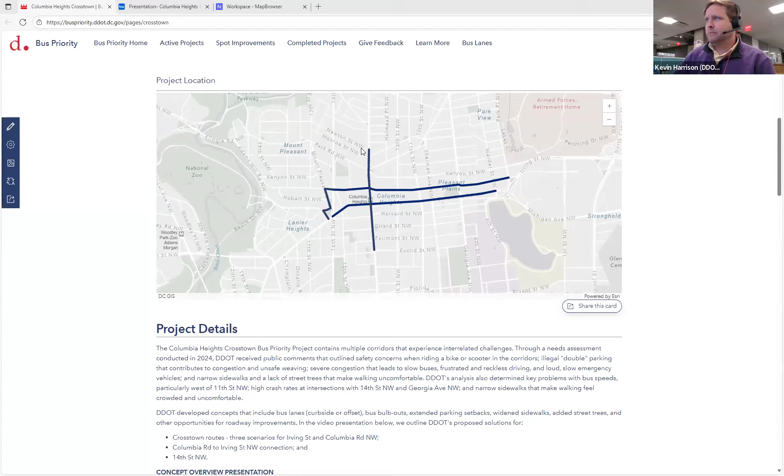It starts with an overview, then a map of the project limits, the areas where we're working, which are Irving Street and Columbia Road, primarily between Mount Pleasant Street and Park Place and Warder Street respectively, and then 14th Street through Columbia Heights. There's a YouTube video of the full version of this presentation you can watch anytime, about 30 minutes long.

Then there's this concept map, which gives a schematic view of the different concepts we're looking at, so read the disclaimer. And there's an interactive map where you can see the existing conditions, jump between the different scenarios, get a general sense of how they come together differently, pan around, and see notes drawing your attention to different aspects of the design.

We'll get more into it, but there are three scenarios for the crosstown routes, Irving and Columbia. Then there's the proposal for changes to the connection the bus makes between Columbia Road and Irving Street via Mount Pleasant Street, and some proposed changes to 14th Street, with call-outs directing your attention to what those differences are.

So that's a really helpful tool. An important thing is you can also post comments right in here. If there's a specific thing you want to call out, you can click on the map and insert your comment. I'm not going to post one now.

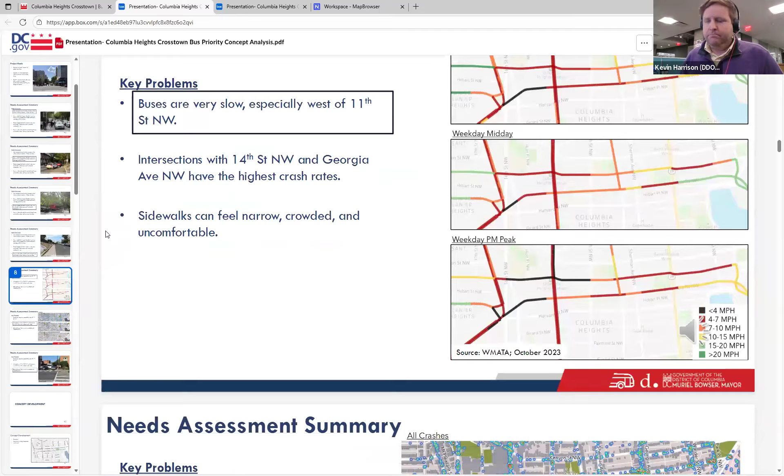The three key goals for this project are to improve the speed for buses. Right now they're extremely slow. You can see in this map on the right that where it's black, buses average under 4 miles per hour, and where it's red, it's in that 4 to 7 miles per hour range. So through almost all of the corridor, during at least some times of day, buses are very slow.

These crosstown corridors cross two streets that are on our high injury network, 14th Street and Georgia Avenue, and those two are also two of the highest crash locations on those streets. On an annual basis, there's about three times as many crashes as the other intersections. So as we work on this project, we'll be looking for opportunities to improve safety.

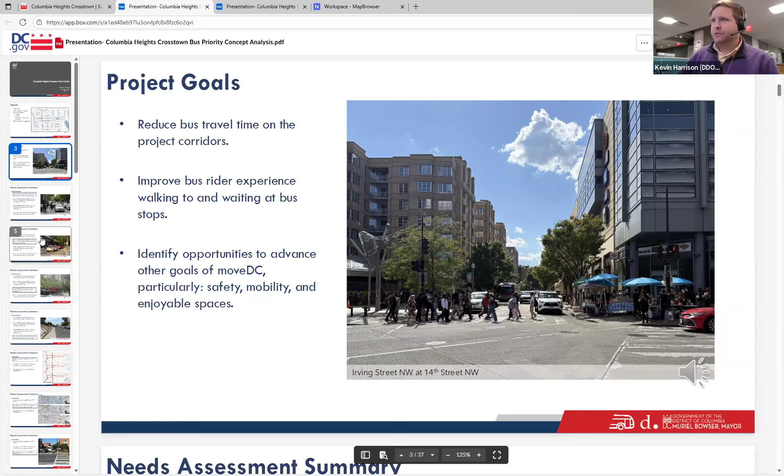To that end, the project goal is to reduce bus travel time, improve bus rider experience—obviously in terms of that travel time, but also importantly the experience walking to the bus stops and waiting at the bus stop—and identify other opportunities to advance the goals of moveDC, our long-range transportation plan, in particular safety, mobility, and enjoyable spaces.

To achieve those goals, I'm only going to give a brief overview right now, but we're proposing three different scenarios. One is curbside bus lanes, shown on the left, pretty much throughout the entire corridor—we refer to that as scenario one, using this section through all of Irving and Columbia in the project area.

Number two is what we refer to as offset bus lanes, where there's parking between the bus lane and the curb, and then the left lane would be a travel lane.

The third scenario is a combination of curbside bus lanes and what we refer to as the traffic calming section. So scenario three has two different sections, 1 and 3, shown here—to the west of 11th Street would be the curbside bus lanes, same as scenario one.

But to the east of 11th Street, would be parking on both sides of the street. Generally speaking, scenario two with the offset bus lanes is the best for public transit because it provides benefit to bus riders all day, every day, 24 hours a day, 7 days a week.

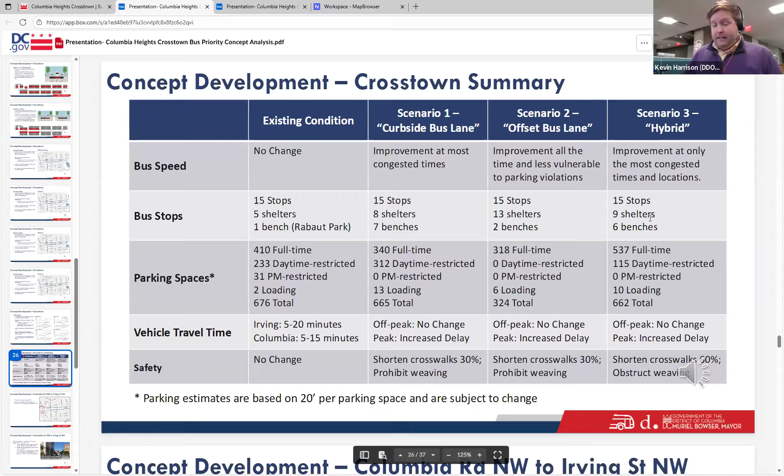But it would be focused on the times of day when congestion is the worst. Scenario three only provides benefit to buses at the times of day when buses are the slowest and in the locations where buses are the slowest. So it provides the least benefit, but there's some other advantages to it.

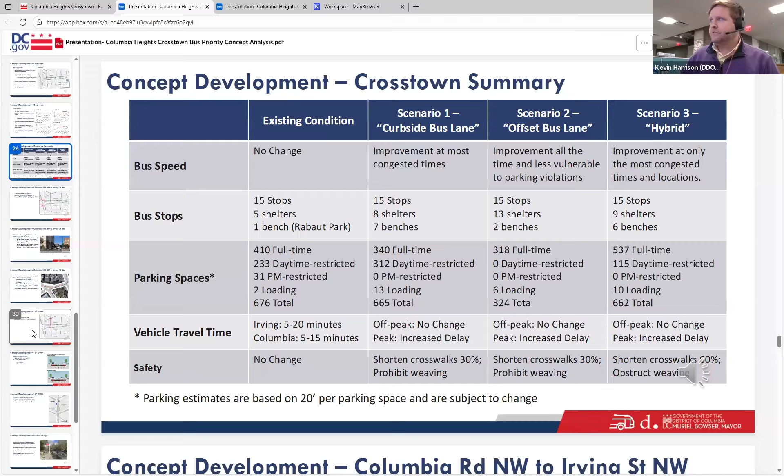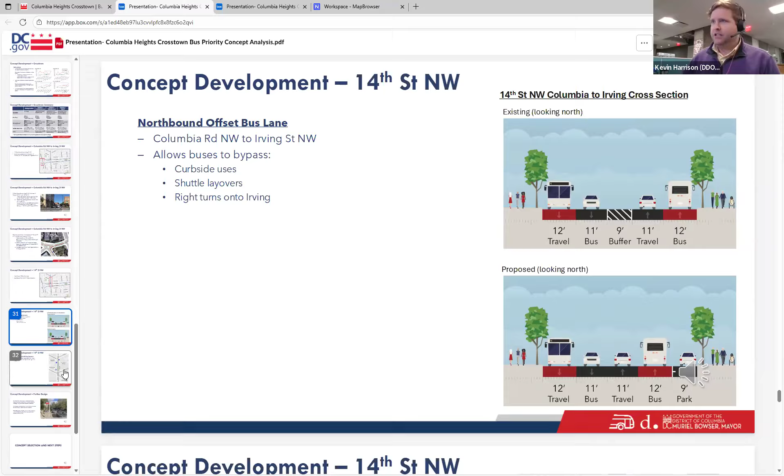I'll just touch briefly on the changes proposed for 14th Street. One would just be moving the bus lane from the curbside to that offset position, so that there would be a parking lane between the sidewalk and the bus lane for one block between Columbia and Irving in the northbound direction. That would allow space for overflow with the shuttles to Washington Hospital Center and other short-term curbside uses.

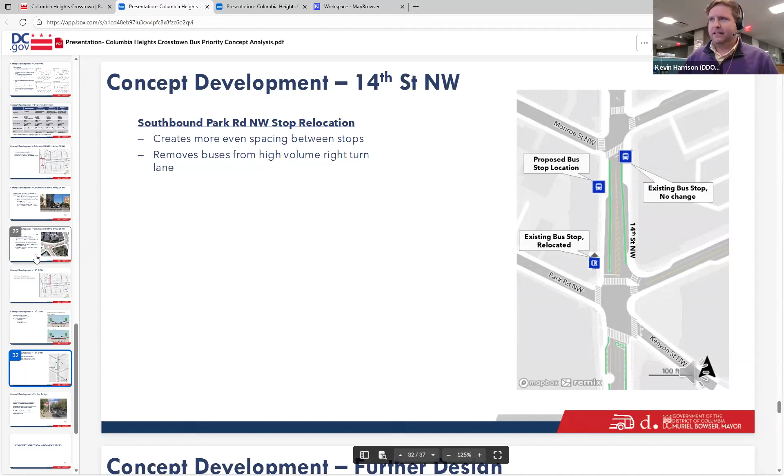We would also move the bus stop at Park on 14th Street southbound from Park Road to Monroe Street. I know you guys are in the more eastern side of the project area, but just for awareness about what's proposed on 14th Street, and happy to answer any questions about the roundabout we're proposing at Argonne and Harvard and the sidewalk widening on Irving Street, if you're already familiar. But I'm guessing you'll be interested in focusing more on the east side, so won't get into too much detail there. That's a quick overview.

I'm happy to answer any questions or go into more detail on any of this. But yeah, defer to you all.

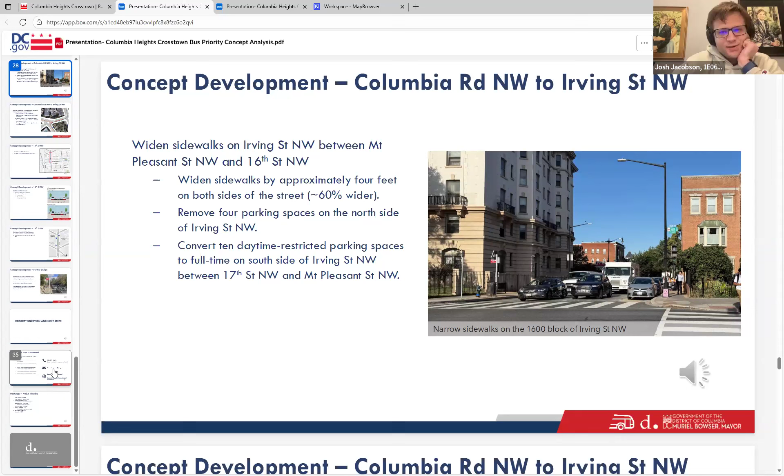Thank you, Kevin. Perfect timing. I think that was 9 minutes.

Oh, and last thing I'll note is that we are currently in a public comment period, ends December 5th. There's a survey that you can fill out at the bottom of the website to give feedback. This is the best way to do that.

But sorry, that's really it. Happy to answer any questions.

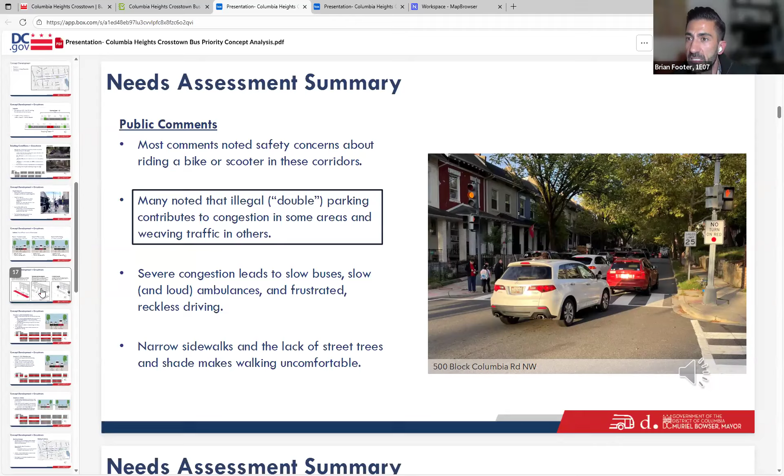Okay, and a lot of the behavior you're talking about — for example, in the image here is a commercial vehicle who's probably dropping something off, or maybe somebody's moving. How would you mitigate that kind of behavior? You're setting that as one of the causes of crashes. If there's only one lane, where do they go? If there's a bus lane and one travel lane, are they going to block buses, and is it just creating chaos? How do we mitigate other behaviors already happening in the current state?

One of the things we're proposing as part of this project is what we're referring to as extended parking setbacks. In the district, you're not allowed to park within 25 feet of a crosswalk. What we're proposing is at many intersections, increase that setback by about 25 feet, so throughout the corridor there will be a space — depending on which side of the street has the full-time parking — set back about 25 feet for short-term access. It's not a guarantee that whenever anybody needs to make a delivery to one of the houses on these blocks that it'll be available, but it'll increase the probability.

Depending on the scenario, people who commit violations will be either in the bus lane or the left travel lane, and there is automated enforcement for that. So the hope is that people use an alley or side street for loading instead of the street.

The extended parking setback is fantastic. One of the things I've been hearing from a lot of people is that there's been a lot of disruption, particularly in commercial corridors, where food deliveries and things like that have no space to stop, so they end up going into bike lanes or double parking, and it's very disruptive. So that seems like a really good way to mitigate some of that.

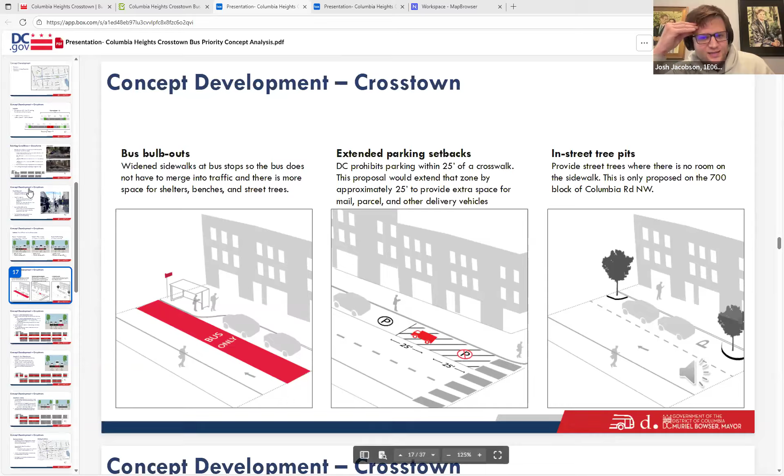Thanks, that's helpful. Another thing I've been trying to puzzle through is another data point I'm not sure if you have — I remember for the Georgia Avenue bus lane project, DDOT had data on the percentage of people moving through the corridor in private vehicles versus the bus, and I think the bus was roughly 51%. Does DDOT have any data on the modes of transit going along Irving and Columbia today?

I think there's over 6,000 people a day that ride the C61, which is the main route that goes through this area, but there's also the C74. And then each street, I believe it's in the 4 to 7,000 a day range. Columbia Road has higher volume than Irving, but they're comparable. I don't know what the exact percentages are.

Oh, those numbers match up with what I've seen for the buses. I guess I'm curious more along the percentages — what sense do we have of the percent of people going through the corridor that are on the bus versus in a private vehicle? Some of that can be easier to sell to the public if they hear, oh, like 50% of the people on the road are actually in the bus.

No, we don't have it. I don't think it's as high as it is for Georgia. But yeah, it's about 6,000 average daily riders on the C61, and then the average daily traffic on Irving and Columbia is in the 4 to 7,000 a day range.

Sorry, when you say average traffic, do you mean 4 to 7,000 vehicles? Yeah, 4 to 7,000 vehicles. Okay, so it's still probably close to the 40 to 50% range, I guess, but it depends on the number of people in the vehicle.

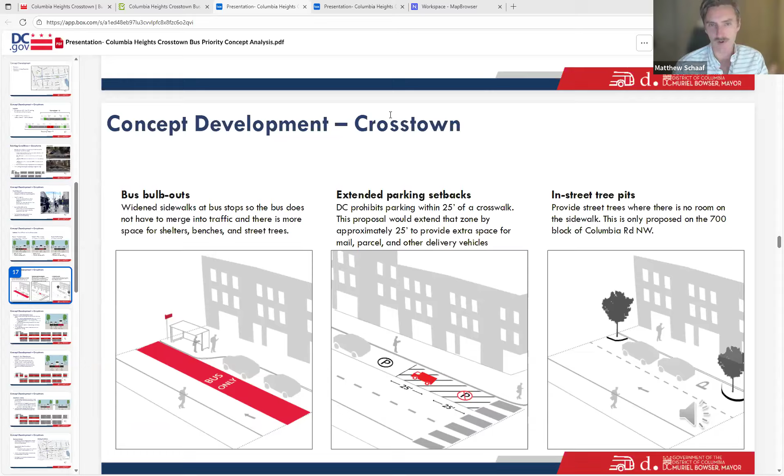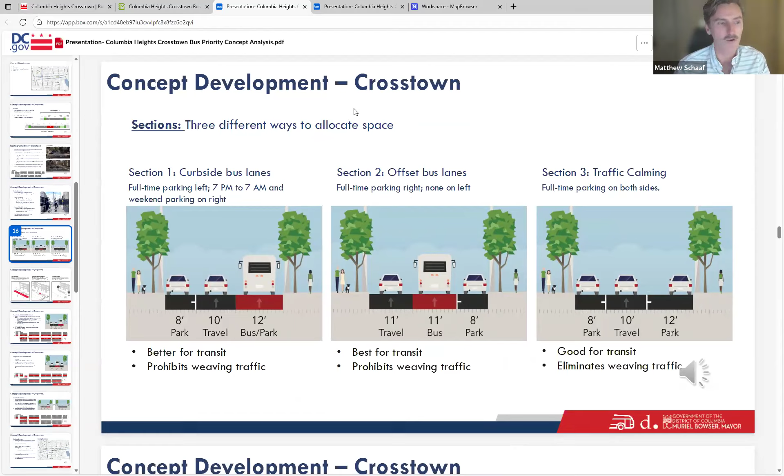Given that improving the bus experience and the timing and speed of buses is the priority, I wanted to ask about the proposal to have a bus lane that is 24 hours in some locations and a limited time period in other locations. Mostly I want to understand how does that transition work — do drivers actually follow that? As a car owner, I might not notice if there's a small number change on a sign for a couple of blocks stretch of the road, so I want to understand the logic behind that.

Yeah, so for this scenario one, it would be 7 a.m. to 7 p.m. for the whole corridor, 5 days a week. That's a slight change from the current curbside regulation, where on Columbia Road it's daytime restricted for the most part, 7 a.m. to 6:30 p.m. We'd actually be changing it to 7 a.m. to 7 p.m. just to make it more legible and easy to understand for people.

The one exception, kind of to your question, is on Irving Street from Mount Pleasant to 14th Street — it would be a 24-hour bus lane under all of these different scenarios. This is an area where parking is not currently allowed anyway, so it's not really any change in the parking regulation. These are the blocks where there's Lou's Sports Bar, and that stretch by what used to be the Wawa and the Five Guys. So that would be a full-time bus lane through there, and then it would switch to almost the same as the current parking regulation beyond that.

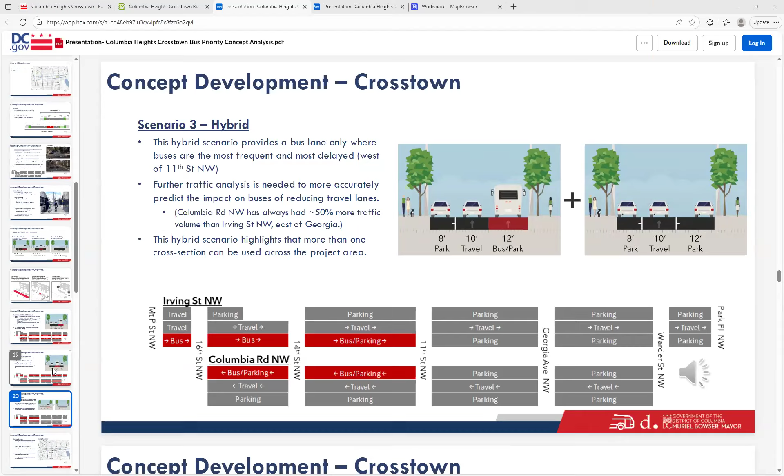I think it's interesting that we're highlighting the demand for parking on Irving specifically, because there's a parking garage right there. I understand this is a lot of retail parking and people want to run in and out, but we live in a society and people do need to park where there is parking. I think we should work on highlighting the fact that there is in fact a parking garage that people can utilize, which is a rare thing, especially in a super dense, transit-oriented area like the 14th Street Columbia Heights intersection.

More of a general question about the different proposals: 14th Street got a road diet, or bus lane, not too long ago, the one that runs from Fairmont up into Park. I would not call that project particularly successful. I'm a person who takes the bus on 14th and the bike lanes very, very frequently, and it's really frustrating to see cars parked there, the bus still moving slowly, being blocked. I'm a little frustrated to see more half measures being proposed to fix this, as opposed to doing what's going to be best for what DDOT is showing to be 51% of the users on the road, which would maybe be center running bus lanes.

To end this rant, my question would be: what is DDOT doing to make sure this isn't just another half measure, and that it will actually solve the issues for people in the neighborhood who rely on transportation, not car ownership, to get to work, the hospital, since that's been brought up a lot. What is the promise that DDOT is making to the people of the neighborhood to ensure this will actually improve our neighborhood, and not just make the traffic patterns worse and more confusing again?

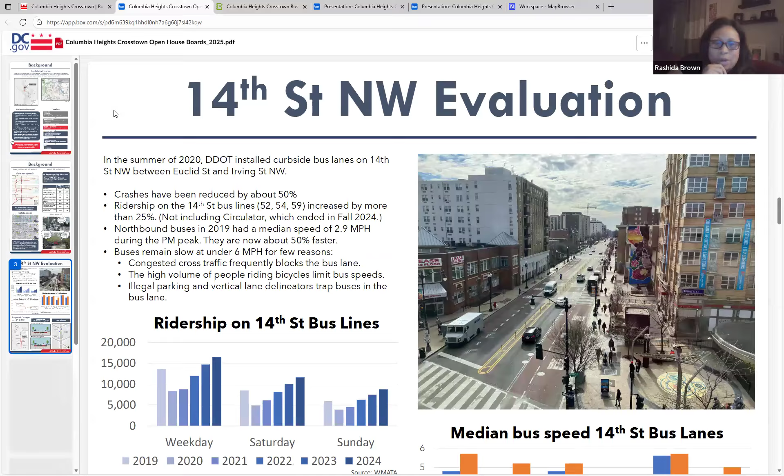Thank you, Kevin, so much for your presentation today and for all of your hard work on the crosstown transportation plan. I've been supporting the plan since 2014 when it was released and unveiled to the community, both in wards 1 and 5. This ANC, particularly when we were ANC 1A, has repeatedly supported this plan, both an overall concept of a priority bus lane and other traffic calming measures that come with this particular plan. Speaking as someone who has been part of this work from the beginning up until this point, it's been a real pleasure to be a part of.

I have just one comment, because a lot of this crosstown plan has been informed by prior studies, and there was one in particular done on Irving Street. The Priority Bus Lane project seemed two-pronged to me: one was to improve ridership and customer experience, but two, also to reduce speed down Irving Street beyond Sherman Avenue, because that's when the residential lanes start, as you move from 14th Street through Georgia Avenue and East. I'll just focus on East in our SMD now that we're ANC 1E. Speed has been a huge issue for us, as well as crashes that lead to injuries and deaths.

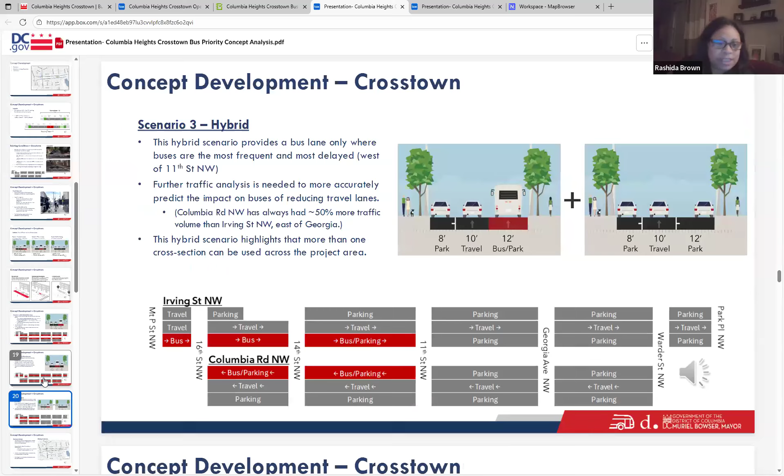I'm wondering if you can integrate that assessment data, the traffic and crash data, onto the assessment slide, just to demonstrate where we've been and where we are now. My community members in my single member district have been expressing support for the hybrid model, and that would be scenario one for us, recognizing that scenario two would be Mount Pleasant, 16th Street, 14th Street, and on until you hit our ANC. So, a question and a comment.

I appreciate that. And I didn't mention the crosstown study, which is a big part of what we're building on, which was completed—published in 2016, but the work had gone on for a couple of years, so there was quite a lot of public engagement. It was finished up right before I joined DDOT, but we certainly are building on that.

To your point about Irving and Park Place, you do see this large volume of crashes at that intersection. It caught my attention when I was looking through the crash reports, and DDOT did do a project, I believe in 2023, converting that right lane from daytime restricted parking to 2 lanes on the approach down to 1 lane with full-time parking on the right. They also replaced the traffic signals—there were two signal heads, one that stuck out 6 feet into the road, dramatically improving the visibility of the traffic signals, and added retro-reflective backplates to make them more visible. Having informally looked at the crash data, it was very effective.

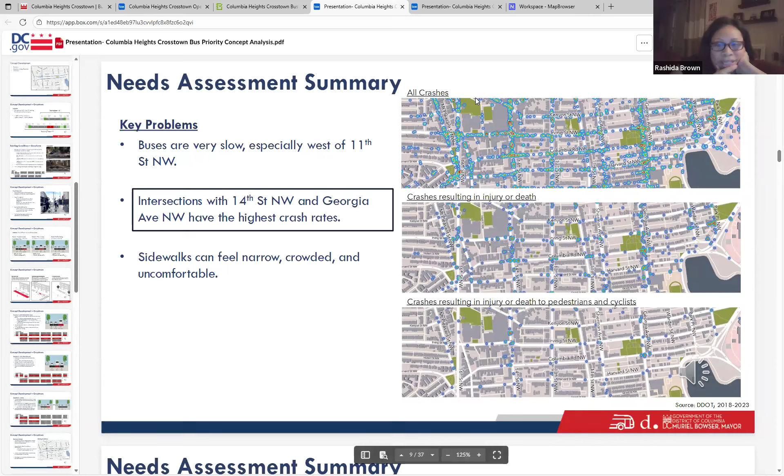I just wanted to say for the record, for my SMD community members, that the lane of parking, while it's enjoyable to have, is less about convenience and more about the fact that we've reduced crashes significantly. Lifting that up during non-peak hours is just a concern for me. But we're all full proponents of the priority bus lane.

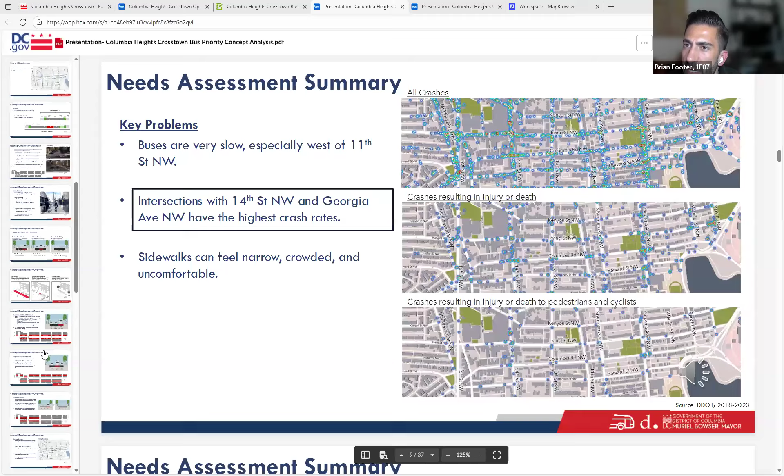In trying to determine where the bus lane would be—either furthest away from parking or right along parking—is there any pro or con? What ends up happening? Is it better to have it next to parking because there's less vehicular traffic and pedestrians getting to cars are less likely to be affected, or what's the science there?

The general concept with the offset bus lane is that when cars stop to do quick pickups and drop-offs, it's not happening in the bus lane. It's been effective in other areas—there are examples on H Street Northwest and I Street Northwest downtown where the parking is between the bus lane and the sidewalk, as opposed to having the bus lane adjacent to the sidewalk. I'm not sure if this answers your question exactly, but that's the idea—to reduce violations so the bus lane stays more open. Awesome, that answers it perfectly. Thank you.

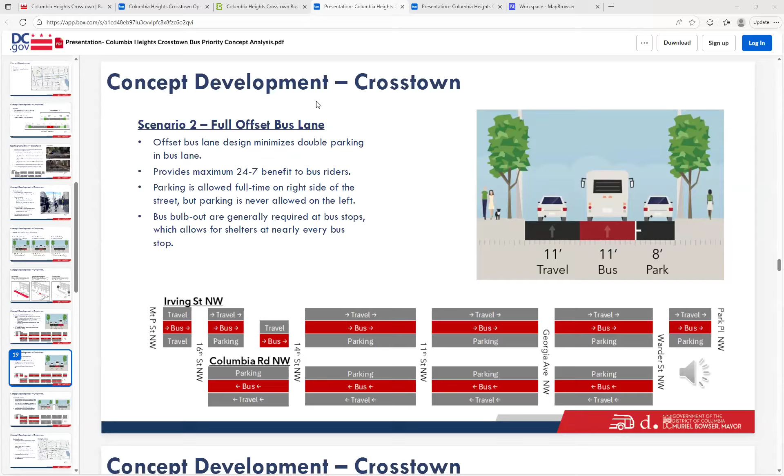Following from some of the conversation, Kevin—curious, given Commissioner Brown's concerns, are there other ways DDOT could address some of those reckless driving concerns with scenario one east of Georgia, or do you think those are probably going to happen no matter what?

It's a good question. I'd want to take that back to our engineering team and some of the other planners and see what they think. Some of our bus lanes have been in long enough now that we might be able to read a little more detail from the crash reports and see how frequent that type of behavior is, at least in terms of resulting in crashes. Also, some locations have traffic counters that tell us speeds, so we can see if somebody drove down the road at 50 or 60 miles an hour, far in excess of the speed limit.

I'd want to take some time to put together a response to that. I think it's a good question, and yeah, something we can work on.

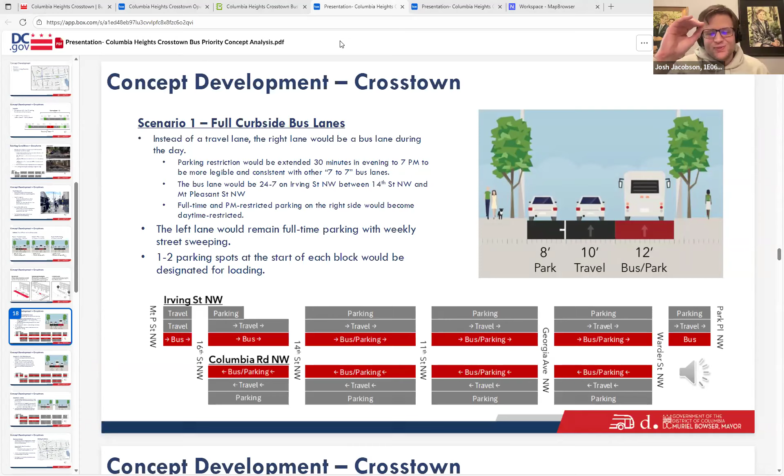Sorry, are you hearing me? Is this a question for me? Sorry, yeah, sorry, the question was what would the impact be to the bus if hypothetically we said scenario one east of Georgia and scenario two west of Georgia? Oh, I'm sorry, I thought you were asking the other commissioners. No, I'm just thinking about something that could work in a resolution.

Okay, yeah, I mean you guys could certainly provide that feedback, such that it would be the offset bus lane west of Georgia, but a curbside bus lane east of Georgia. I think the impact on the bus is something we'd need to look into a little bit off the top of my head. I am a little bit concerned about the curbside bus lane on this block between Warder and Georgia because there is that daycare on the north side of the street, so there's a risk of violations in that particular location. I think the offset does have benefit, but

that's not for the whole day. So at other times of day the bus lane would be effective, and we may be able to come up with some sort of workaround for that - create some pickup option, figure something out basically. But yeah, that's something we could look at certainly, though that challenge is present with the curbside bus lane no matter what happens

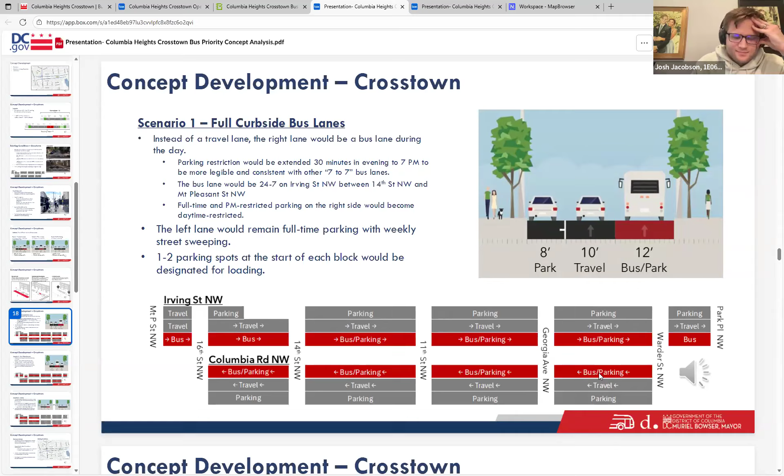I don't know if it specifically answers your question. The reason we have the kind of hybrid scenario is because buses are the slowest west of 11th Street, and there are more buses west of 11th Street - that's where the D74 and the C61 operate. So buses are less frequent and faster on the other side, so we're more open to compromises in terms of the bus facilities farther east, but it would still have those trade-offs.

Got it, thank you. And Commissioner Brown?

Yeah, thank you, Kevin. Please, as you're assessing that for Irving Street, there's also Woodbridge Daycare on the 600 block of Columbia Road, so right behind it but a block over. And you were talking about alternatives of traffic calming during those peak times - just a comment, you might want to coordinate with the Vision Zero team, because they're really helpful in finding some innovative calming measures when we were dealing with some unique challenges for Irving Street and all along Park Place and Michigan. If the folks who helped us are still there, I'm sure they can provide some back history to whoever is on the engineering team now - they worked with the engineering team. So just a comment, hopefully they can help think through some things because they helped us.

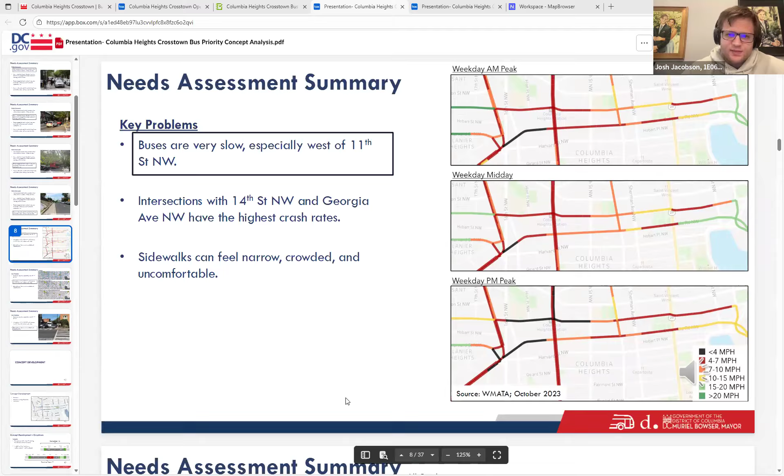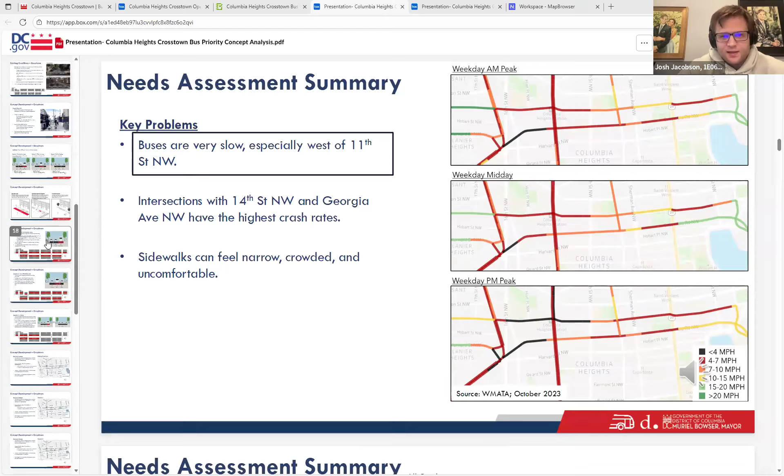All right, not seeing any. So I think in follow-up, Kevin, it would be helpful if you could get some sense of what could be done in terms of traffic calming in the scenario 1 situation east of Georgia Avenue.

And then understanding what the impact would be generally switching between scenario 1 and scenario 2 or vice versa. So I think Commissioner Brown's concerns can be summed up as concerns about reckless driving along Columbia and Irving east of Georgia. Is that right, Commissioner Brown? If there's nothing that can be done about that, that's helpful to know.

If there is something that could be done, then maybe we would say okay, we want to support scenario 1, assuming DDOT does these traffic calming things. Or if nothing can be done, maybe we'd say we want to support scenario 2 in this area and scenario 1 in this other area.

And I know it's not a hard science, so there might not be good answers, but we want to have that information because I suspect those are the same questions other commissioners will be asking when we discuss at our full body meeting.

I think also under that proposal it gets into some of the questions about changing the hours of the bus lane in different parts of the corridor that came up earlier, which is something we try to avoid. But that doesn't mean it's not possible.

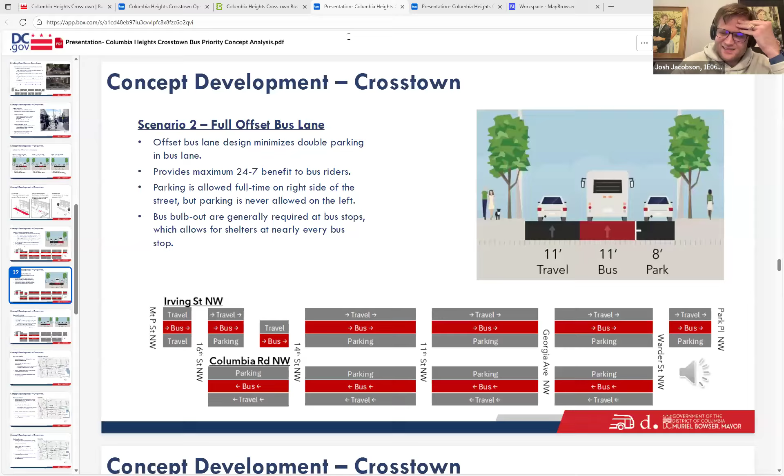We'll look at some of these things and try to get back to you. Good questions. Thanks, appreciate you joining and answering all of our questions. Any other final questions for Kevin before he hops off?

All right, well Kevin, I appreciate you joining. You're welcome to stick around if you want, but obviously it's late and I'm sure you have other things you want to do on a Wednesday evening.

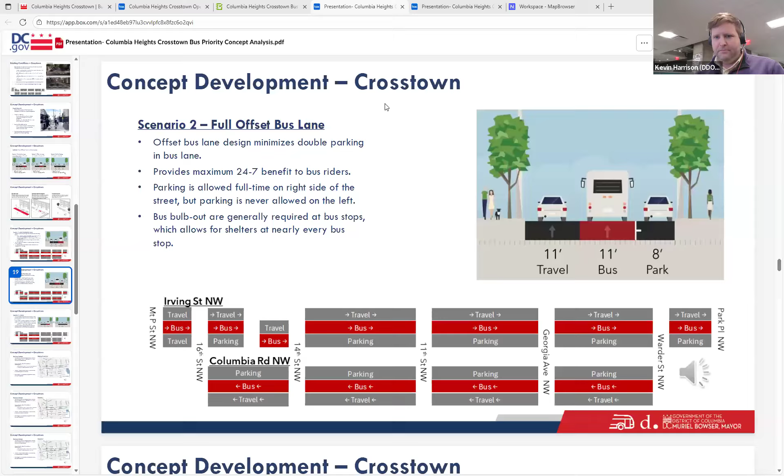I figured maybe it's worth getting a gut check to see where people are at after that discussion, and figure out what sort of resolution we might want to flesh out for the full ANC or what options we want to present. It seems like from the discussion so far, at least among this group, there isn't much interest in scenario 3. Is that a fair assessment?

Speak up now if you like scenario 3. Okay, no one's speaking up. I do not like scenario 3. Great.

And sorry, Allie, you wanted to say something? Or maybe your hand was just raised by accident. Nope, you're going off mute. What's up? Sorry, no, I just meant to unmute.

I was just gonna say, yeah, do not love scenario 3. Okay. Sorry. That's fine, I guess where are folks leaning otherwise then? And if you say you don't like the bus priority project at all, then I'm gonna ask what you're doing here. But that would be scenario 3. I don't know, I guess I'm kind of leaning towards scenario 2.